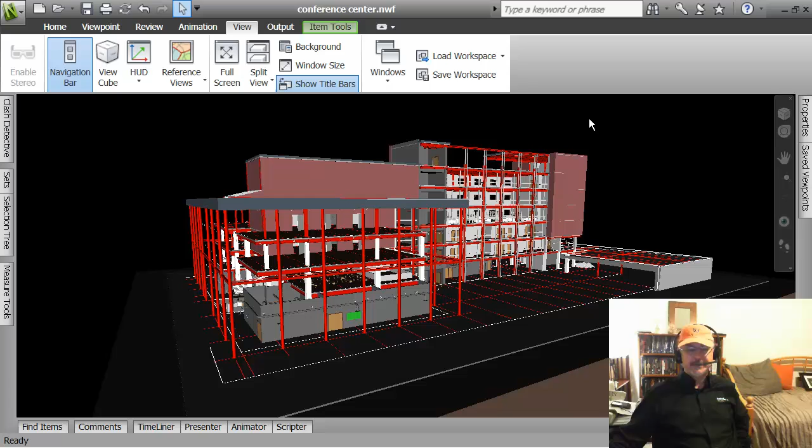Now, I need to be able to find lots of these items named glazed that are in my building. So what I do is I go down to the find items here. I'm going to make this a little bit smaller on my screen just so you can see what's going on. So under category, what I'm looking for is an item, and the property of that item that I'm interested in specifying, and I've got the choice of anything that's in here from my data set, is the name, where the condition that I want to match is under here.

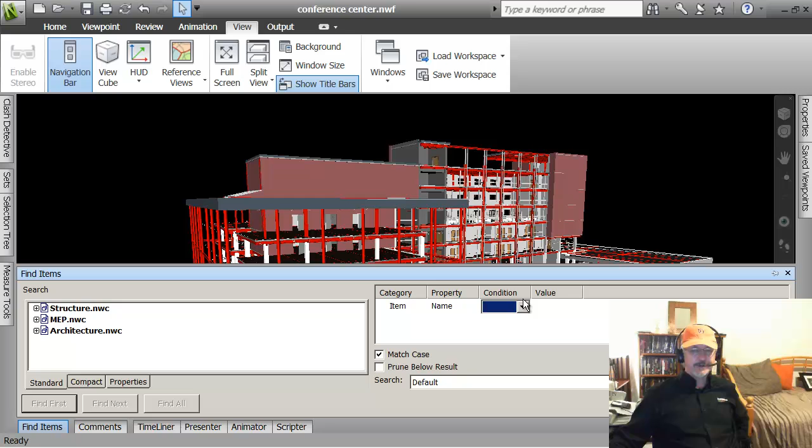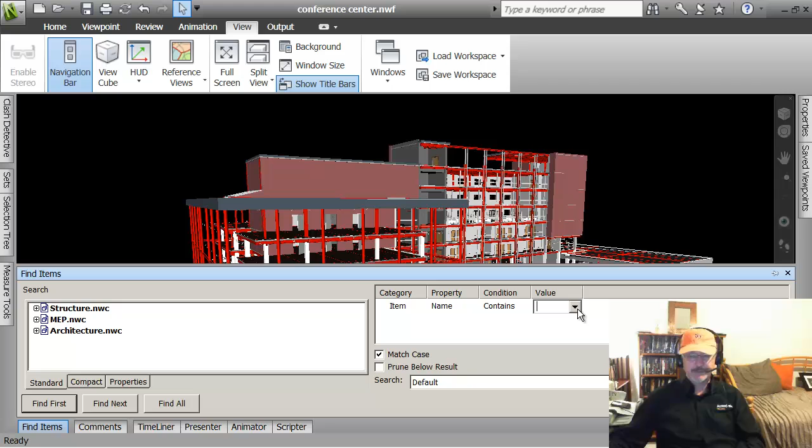Now I could say equals glazed, but I'm trying to do a broad search and make sure that I catch as much as I can in this first pass of the model. So it's probably better to say something like contains, because the actual property might be glazed panel or something else. So this makes the first pass broad.

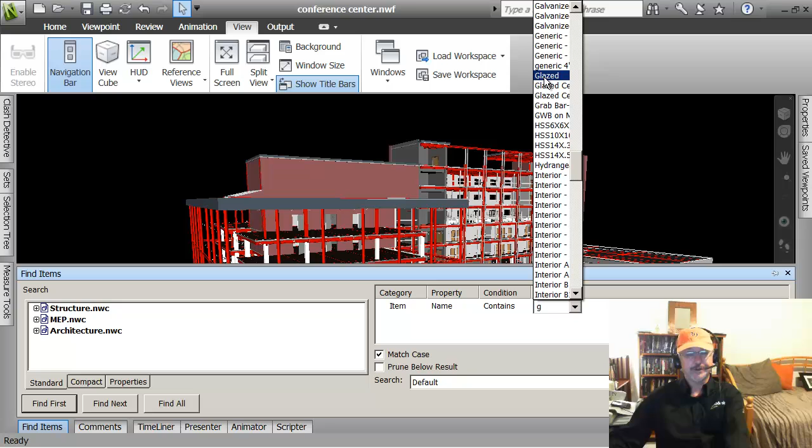And if I look at the items that are here, if I just type in G, it'll take me down to where I've got these options. And I see glazed as an option. So remember that this list is generated by the model that I brought in, so it's really important in the original models that you standardize on naming conventions. It'll make it much simpler after you've brought things into Navisworks.

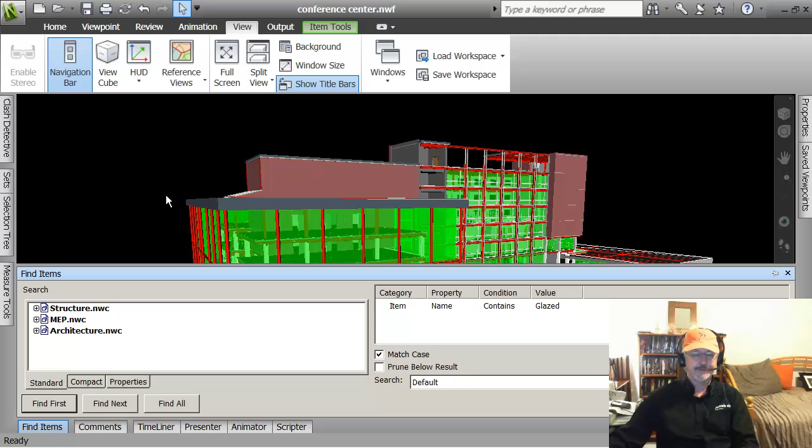So if I do that, I'm just leaving the first item as item name contains glazed. I can go down here, so I've got all three models. I can say find all. You see what it did? It found all of the items in my model, I'm just dragging this up so you can see it a bit, whose name contained glazed.

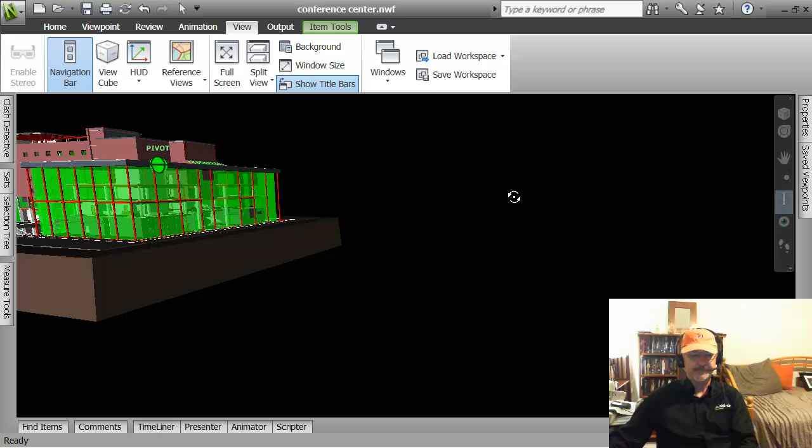But if I go to the orbit command and I turn this around, oops, let's do a constrained orbit like this. I'll turn it around to the other side of the building, and then I'm just going to pan in. You can see that. Well, how come I didn't get some of these smaller windows that are on the top here? I'm going to go home and select just to clear my command here. So what if I pick on one of these small windows up here?

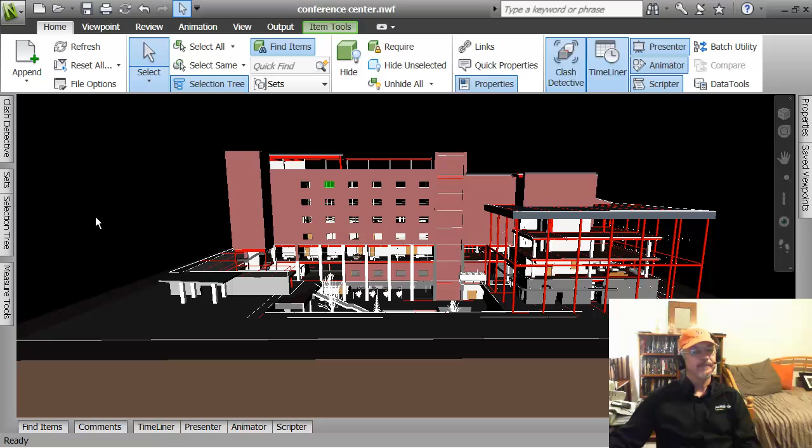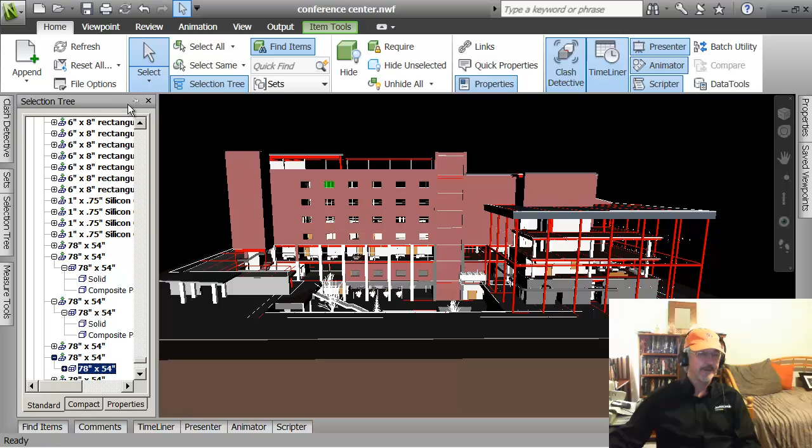Well, another way to dig down into the data is to look at the selection tree. So I've selected something here, and I've got the equivalent of the browser in Revit. It's a tree structure that shows the items that are in here in a hierarchy. And it's important here that I pin the panel,

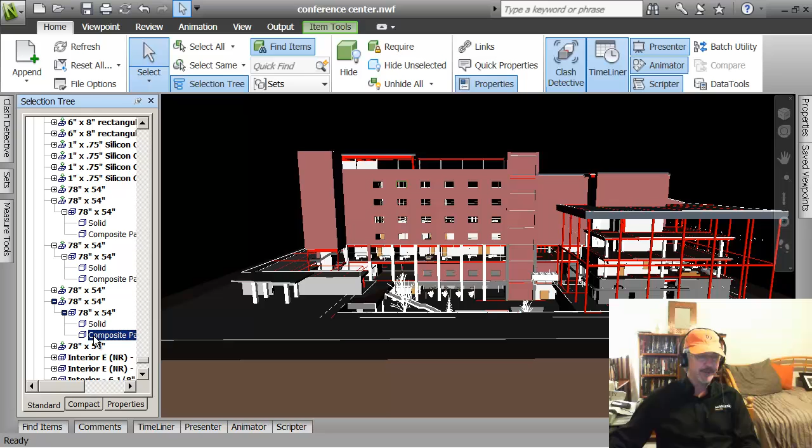because if I don't pin the panel, once I move down inside this object here and I select on that, this would disappear. And so I'm keeping it pinned up so that I can go down and see that my window is actually made up of two different things. If I zoom in and make that a bit more obvious so you can see, there's a surrounding frame.

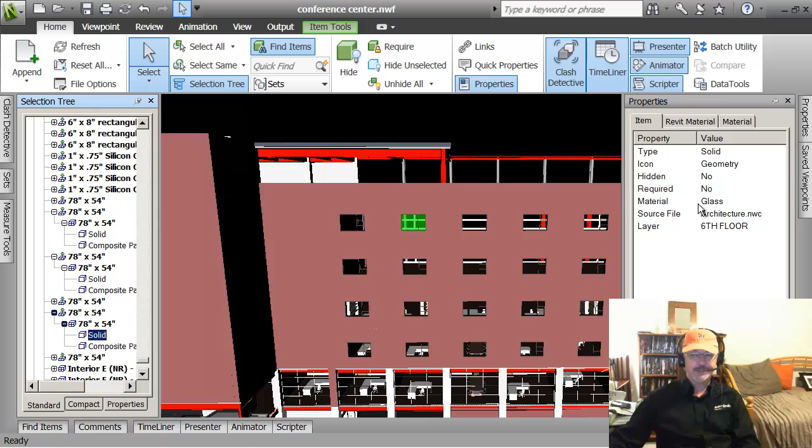So I pick something, I look in here, and you see that if I pick on solid, that's actually the glass. If I clicked on composite panel, that's actually what goes around the glass. So what I'm interested in is the solid; I had to pin that to keep it up here on my screen. Now I can go across to the properties and say, well, it's not an item named glass, but if I come down here I can see that there's material glass. So that's how I'm digging down to find items in my data set.

So if I go back to my find items, I can come down to the next line here and say that now what I'm looking for is an item where it's the material, and in this case I am going to say equals, and I'm going to type in glass. Now if I leave that as it is, that means that the search has to meet those two conditions. I'm looking for items where the name contains glazed and the material is equal to glass, and really what I'm wanting is an OR condition.

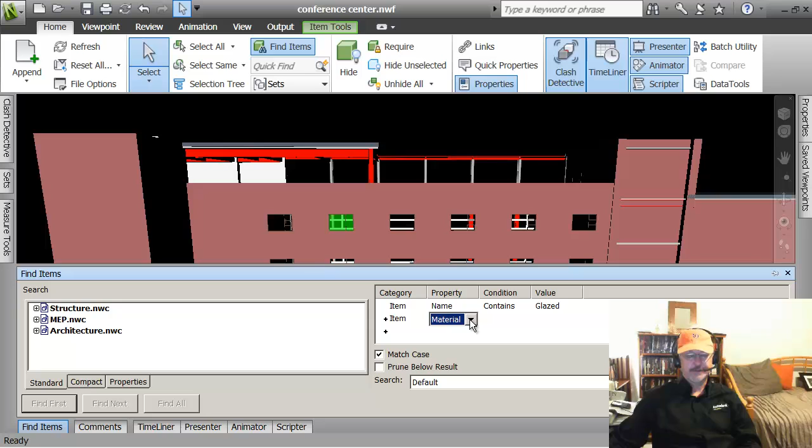So if I right click up here, I can say that's an OR condition. Oops, sorry, I need to be up here on this line and say it's an OR condition. So item name contains glazed, or item material is equal to glass. I really don't have anything here, so I'm going to turn that off on that line. So now I've got the condition that I wanted to meet.

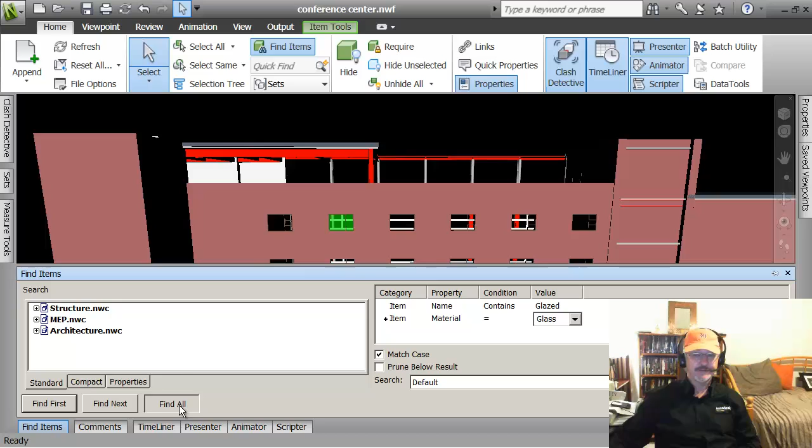So what would happen now, oh, I messed up, let me type that in again. Glass. Now if I go down and I say find all, you'll see that what I've got in my model is much more information. I'm holding the shift down and turning it, to see that I got that whole condition met. So that's how I find things. And then I'll show you how to make a set of these in just a second.